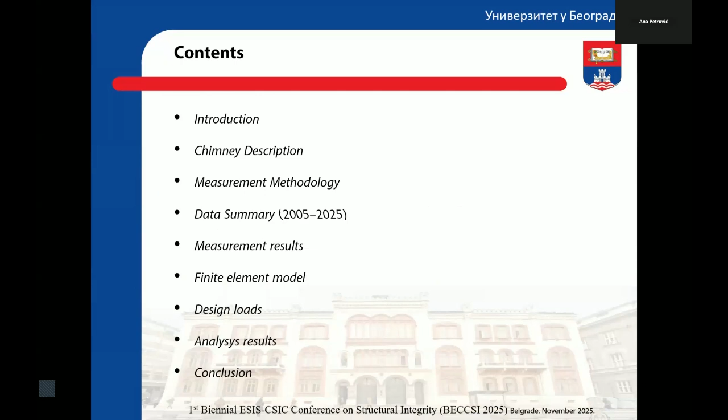Okay. I'll try to be a bit brief because I'm the last one and don't want to take time from a lunch break.

So why is it important to measure chimney thickness? Well, chimneys serve to take flue gases from the burner and take it to the atmosphere. So they are under influence of corrosion and erosion or abrasive action of flue gases, and high temperature, and also the chemical composition of the flue gases also accelerates corrosion. Then those are relatively thin structures, and stability and dynamic effects are also a problem.

And local thinning can cause sudden failure, which happened quite a few times in the past. So it's important to measure the thickness regularly, and it's required by standards.

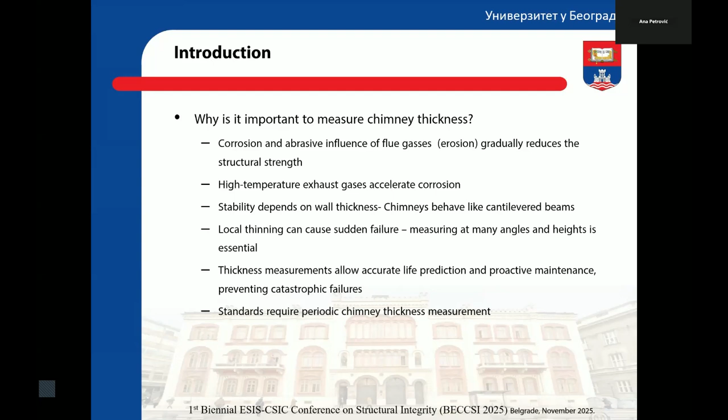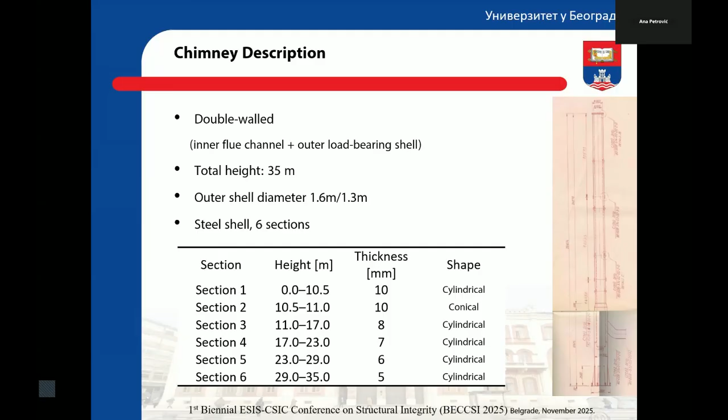So in this case, we have this chimney, which is 35 meter tall and 1.6 meter in diameter, composed of 6 sections. And as you can see, it was monitored for over 20 years, from 2005 to 2025. And the chimney itself was built around 1998, 1999. So it's a single flue duct.

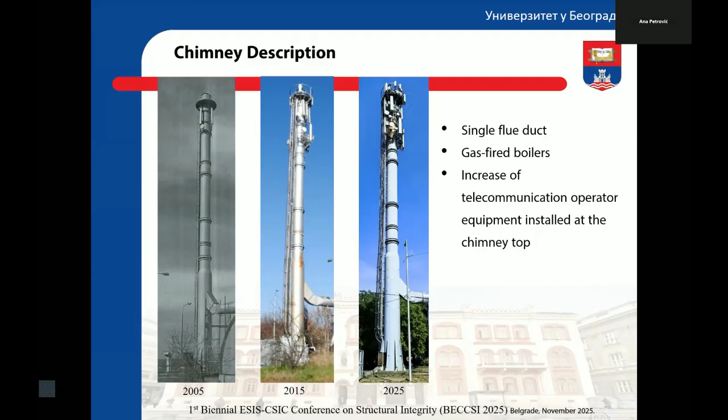It serves as a chimney for a heating plant here in Belgrade. It takes flue gases from the gas-fired boilers. And also what you can see on the top is that during time, a lot of telecommunication operators' equipment is installed on the top of the chimney. So we had a task to see if the chimney can still function safely after this.

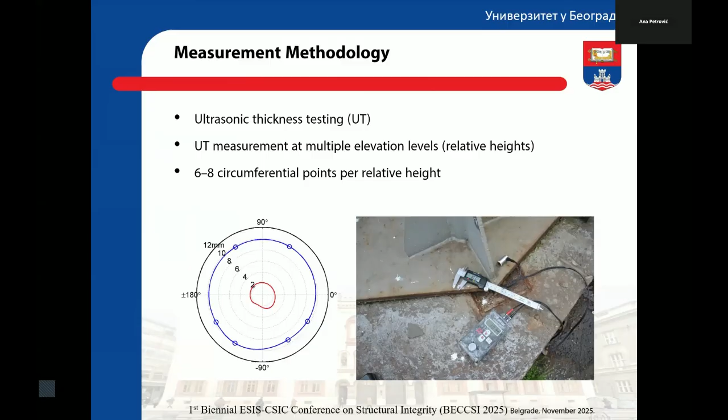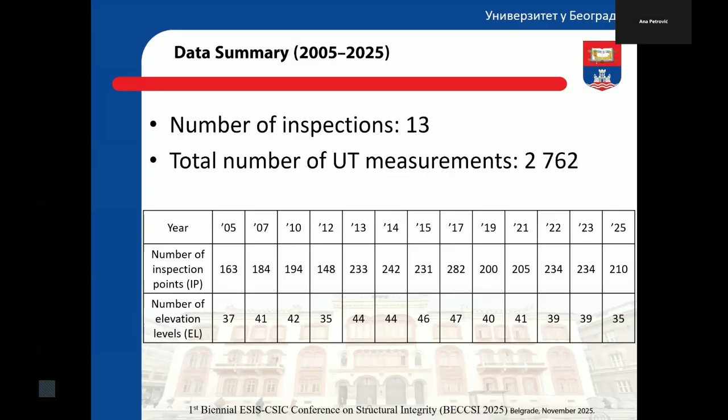During these 20 years of measurements, we acquired a lot of data through ultrasonic thickness measuring. The thickness was measured on different levels and different points around the circumference of the chimney. So here we can see that during those 20 years, 13 inspection runs were made, and a total of 2,762 ultrasonic measurements were completed.

Here are some measurement results. So as you can see, the problem was that not always the same people do the measurements. So the measurements are done on different heights, also on different points around the circumference. So we needed to do some statistical manipulation of results in order to have some meaningful results.

Also, here in the first section, we can see that the standard deviation is quite larger than on the other sections. That's because in the first layer of the chimney, in the first 10 meters, we had the deposits of flue gas condensate, that caused a little bit more corrosion and loss of material in the root section.

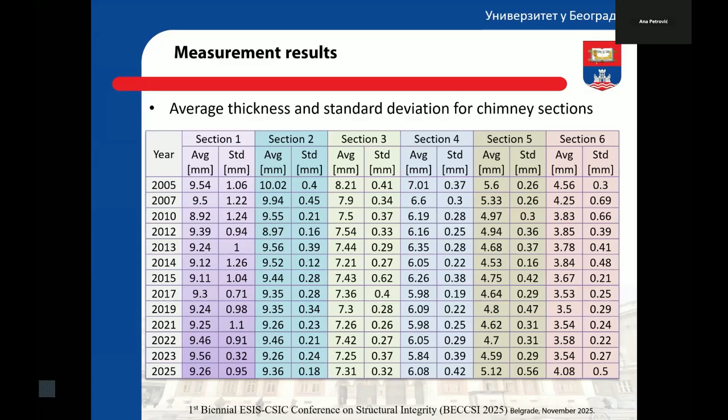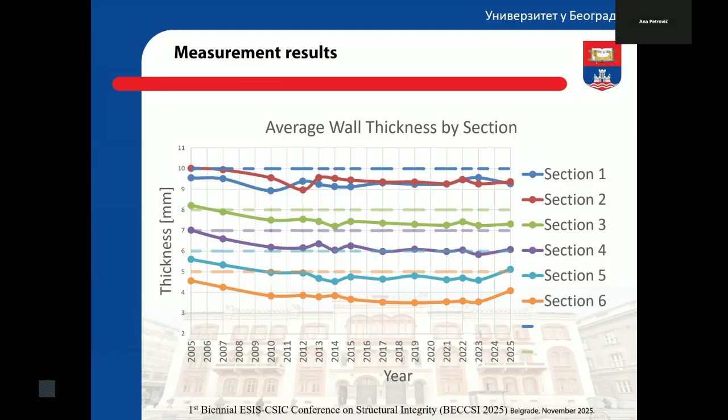This is maybe the better representation of our results. So we can see that around 1 to 2 millimeters of thickness was lost due to corrosion in this period over 20 years. So based on those results, we wanted to see if something unexpected will happen with the load-bearing capacity of this chimney.

So we did finite element simulations in CATIA using parabolic elements, and we used the data mapping functionality to accurately map thickness on the chimney shell. And because wind is the main load in this case, we used data mapping functionality also to simulate the wind effects.

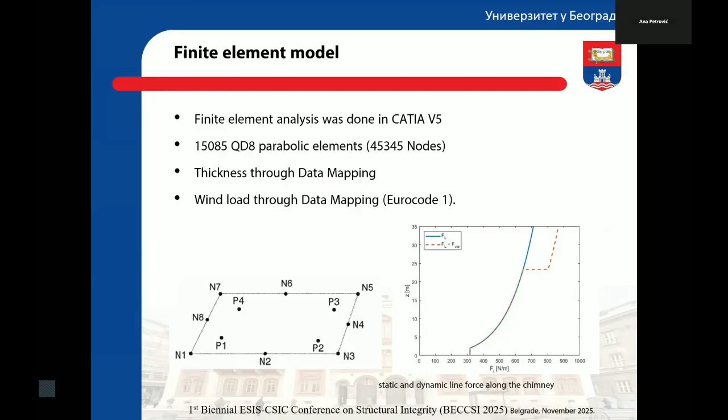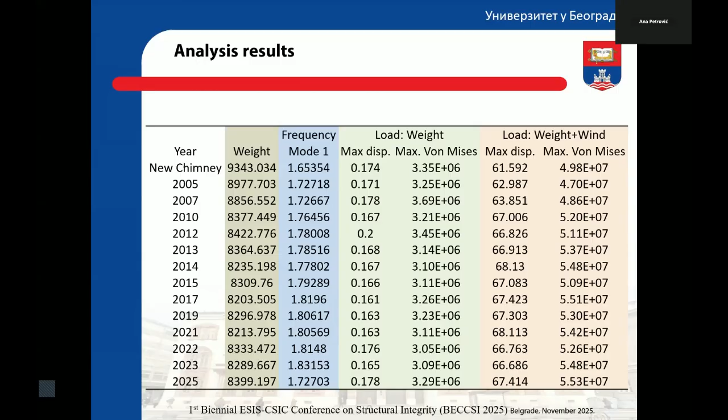So actually, we didn't have anything unexpected happen. And we can see that in this way, we are able to be sure that our chimney will be able to withstand those standard loads. And also, it is possible in this way to do some proactive maintenance, because chimneys are maybe not glamorous parts of the heating plant, but also a part that is required for a heating plant to function properly.